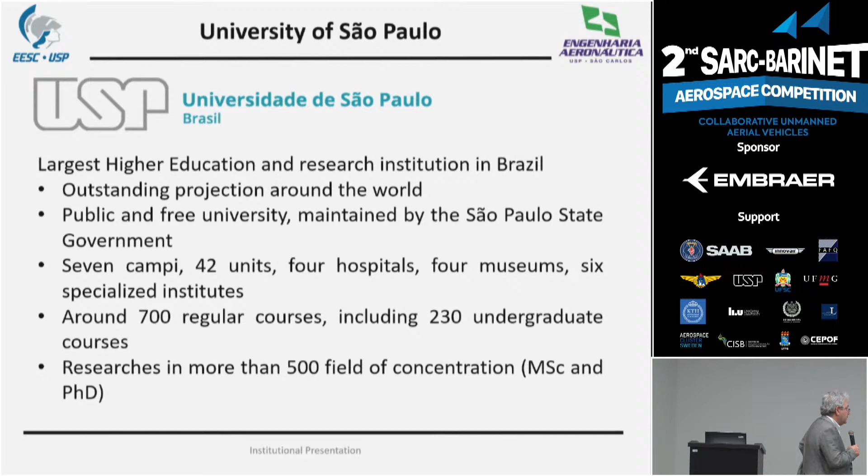Let's talk about the Aeronautical Engineering Department. In fact, this department is quite new, it has almost 50 years in this School of Engineering. But before that, let's talk about USP, the University of São Paulo. It's the largest higher education and research institution in Brazil. We are placed among almost the 100 best universities in the world, and we have seven campuses, 42 units, and among those we have 4 hospitals, 4 museums. Most of the museums of the state of São Paulo belong to USP, and 6 specialized institutes.

About the courses, we have 700 regular courses, including 230 undergraduate courses. USP is very well known to have both graduate and undergraduate courses at a high level.

Some pictures here, and the campuses. We have São Paulo as the main campus where the rector stays, so the rectory is there. Our campus is number 5, of course, the best one. But anyway, all over the state of São Paulo, we have campuses from University of São Paulo.

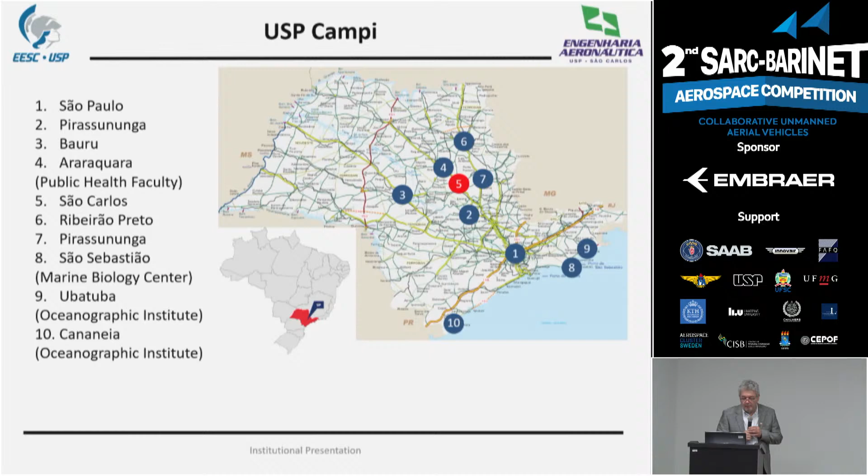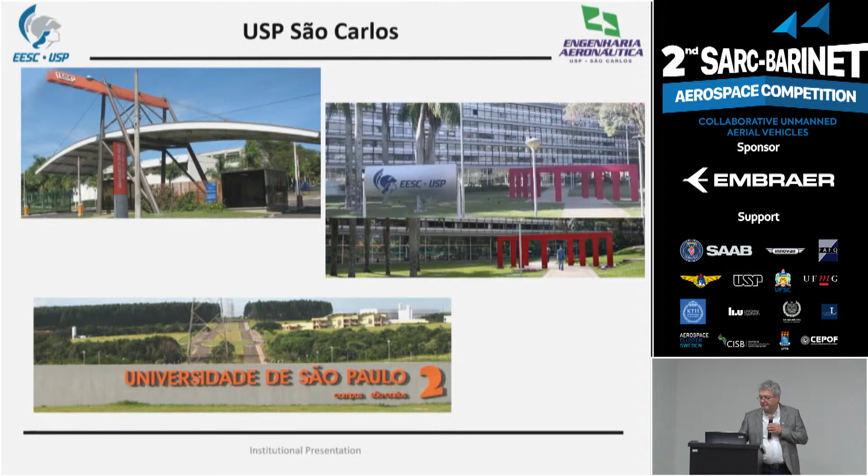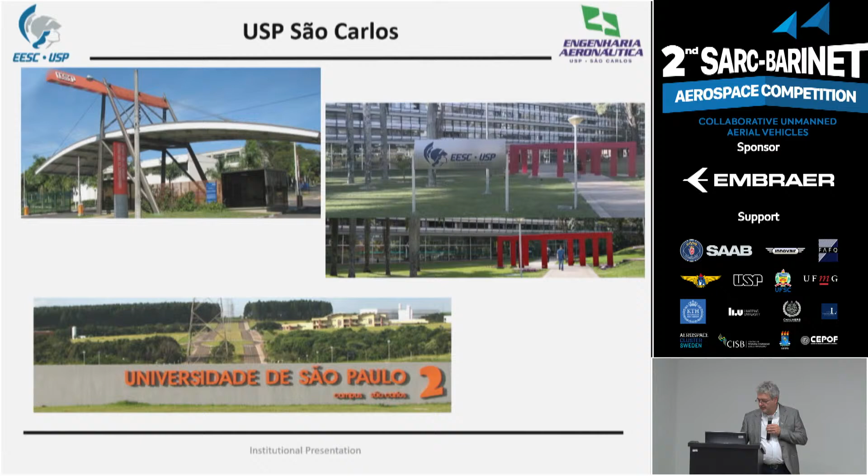1953, the School of Engineering was created here in São Carlos. Next year we'll be 70 years old. After that, campus number 1 was created, and then some departments migrated to constitute the Institute of Physics, Institute of Mathematics and Computation.

And in 1994, the Institute of Chemistry. In 2002, on demand of new courses including aeronautical engineering, campus number 2 was created. And in 2010, the Institute of Architecture separated from the School of Engineering and became its own institute.

This is the main, the 2 campuses. You can see that number 1, area 1, was all crowded, so we had to move to the new one, which is this one we are at the moment.

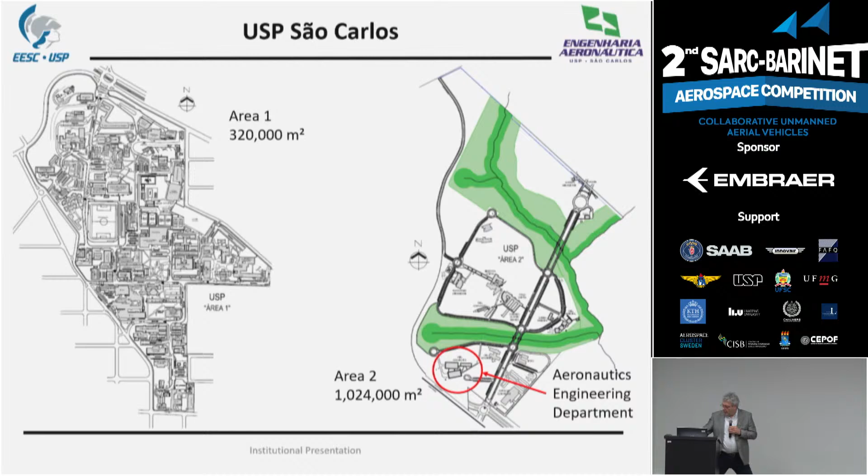We have stayed in São Carlos city since 1953. São Carlos is very well known as a capital of technology today, but in fact we have 2 big universities, the Federal University of São Carlos and the University of São Paulo, and also 2 Institutes of Research on Agriculture, which makes São Carlos a very unique place.

Like, numbers of PhDs by inhabitants are very high compared to Boston, for example. We are very proud about this. But anyway, this is a fact.

Some data from São Carlos. São Carlos is also in the way of the central technological axis of the state of São Paulo. It starts in São José dos Campos, São Paulo, Campinas, São Carlos, Ribeirão Preto. If you start from São José dos Campos and go up to Ribeirão Preto or even further, this part of the state of São Paulo is responsible for 40% of the income tax of Brazil.

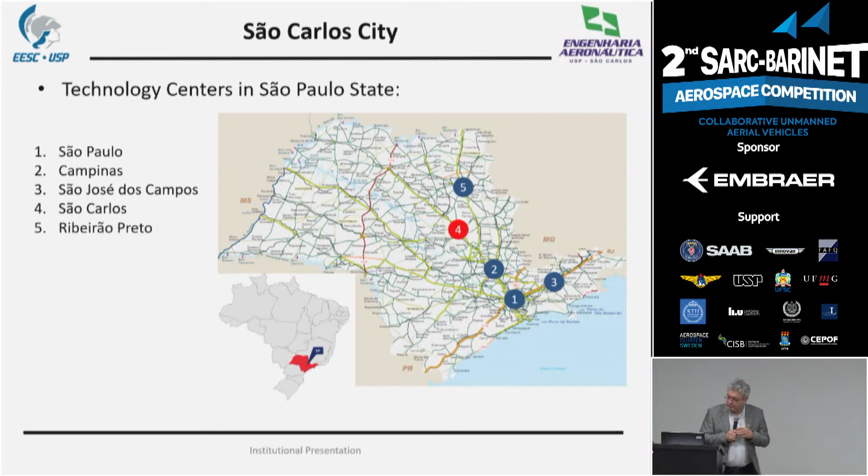Also, São Carlos has become a new aeronautical center after, of course, São José dos Campos, where the main plant of Embraer is located, which is very big. This is starting to become the second place for aeronautics or aerospace.

The São Carlos School of Engineering, as I said, was created 70 years ago, and we have many courses on engineering: aeronautical engineering, civil engineering, computer engineering, electrical engineering and electronics, energy and automation systems, environmental engineering, materials and manufacturing engineering, mechanical engineering, mechatronics, and production engineering.

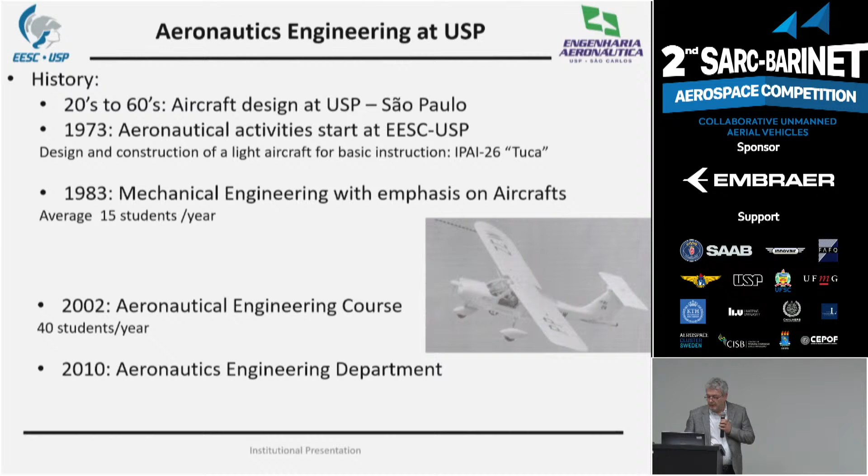In our course, we have some directives. For example, we try to treat students with open programs, and they have to develop learn-to-learn capacity. Also, 15 years ago, we started an internship program with Airbus, so we have international internships for students to go abroad to learn more how to work in the industry. Of course, we also have plenty of internships with Embraer all the time. Also, USP has a large program on double diploma, where people can go abroad to study at the same time. With only aeronautics, we have 8 universities in Europe to do the double diploma.

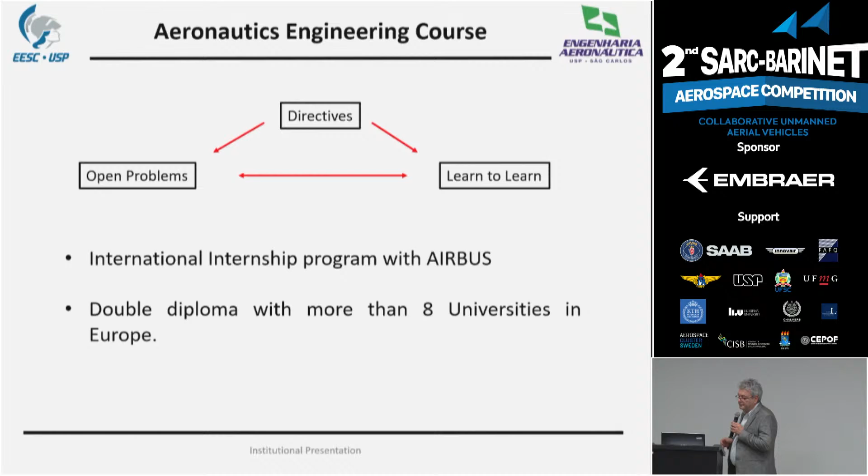This is the facilities we have today, and we're going to visit these over 2 days. In the laboratories, we have laboratories on aircraft design, aerodynamics, aeroelasticity, computational laboratory, flight dynamics, structures, aircraft maintenance, and acoustics. So these are areas where we're developing research.

All the students also participate in extra class activities. One of the main ones is the AeroDesign team. The AeroDesign team of the department is probably the most successful team in Brazil. They won several times here, and after that they go to the United States for international competition.

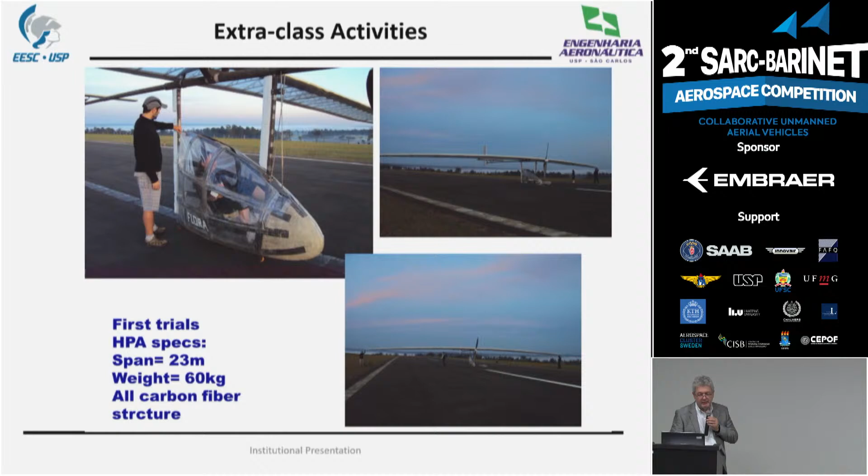Another extra class activity, for example, is human-powered aircraft. There is also an aeronautical week developed by the students. Every year there is a week where they do seminars and other things on aeronautics. The secretary for aeronautics also develops visits and other activities inside the campus.

I'm waiting for the computer to think here.

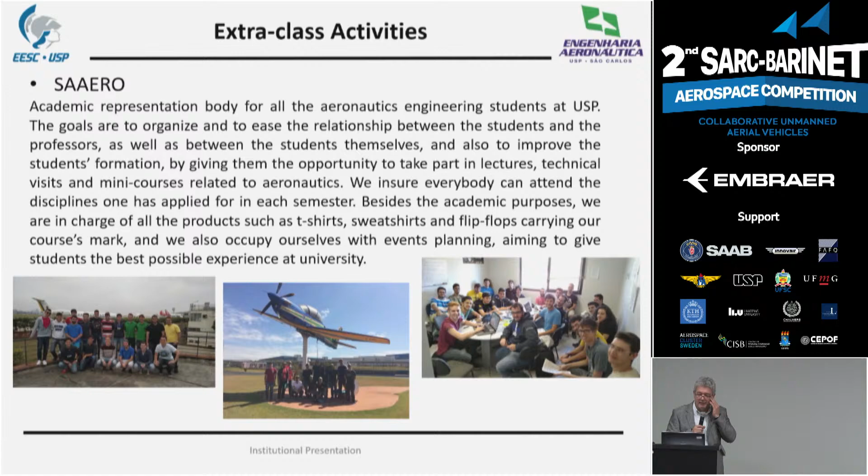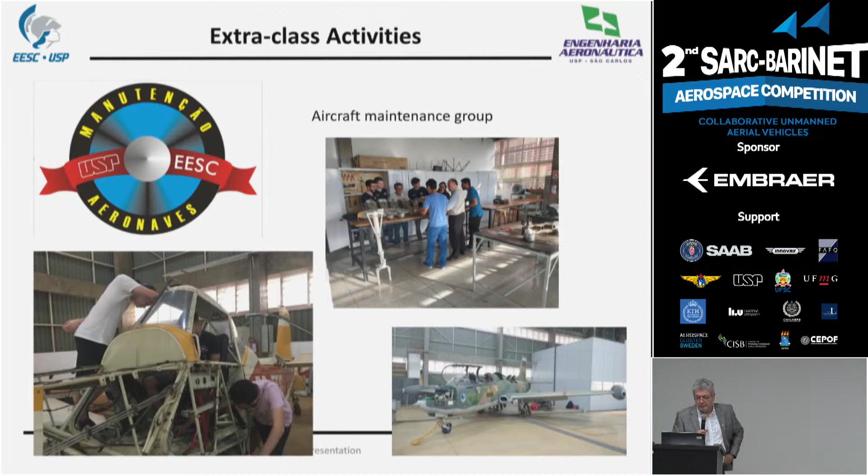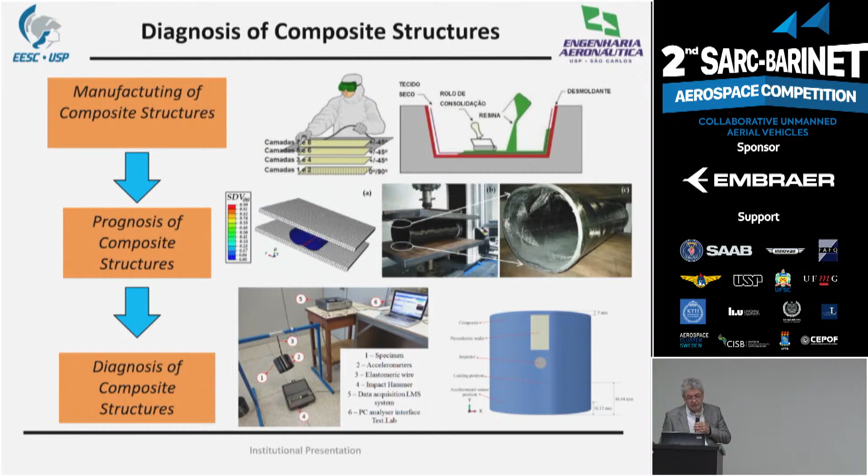And I'll pass very quickly because our time is not very high. Some research we do here in our department: the first one on materials, composite structures, prognosis of composite structures, flight dynamics and control systems.

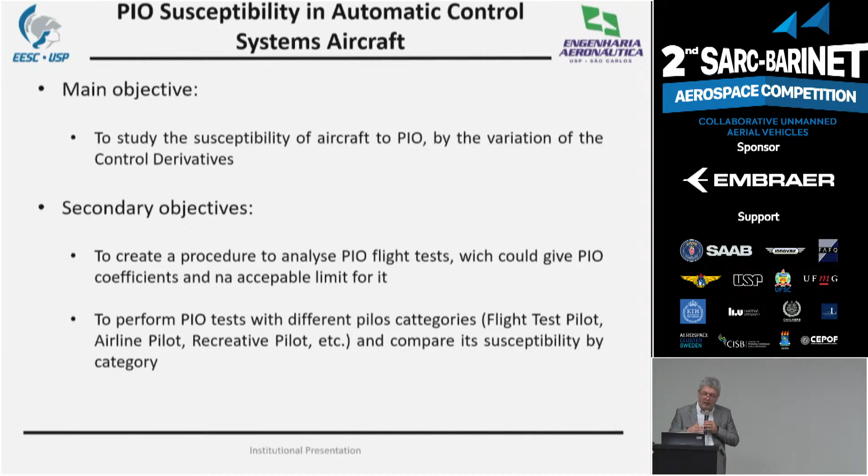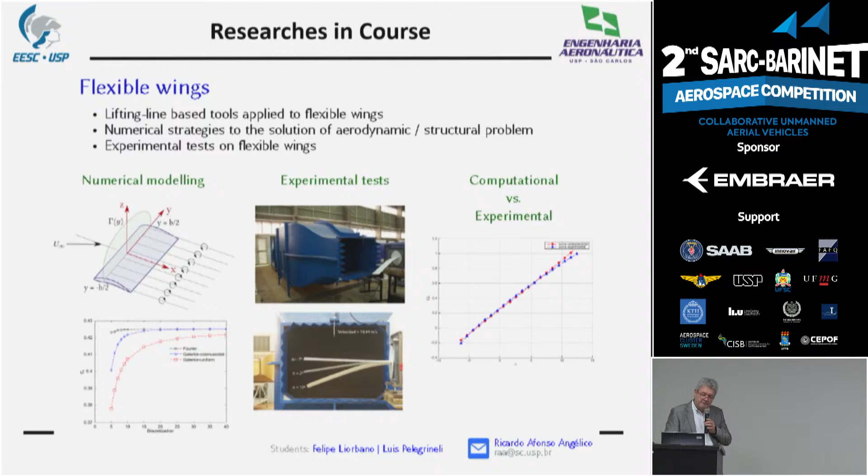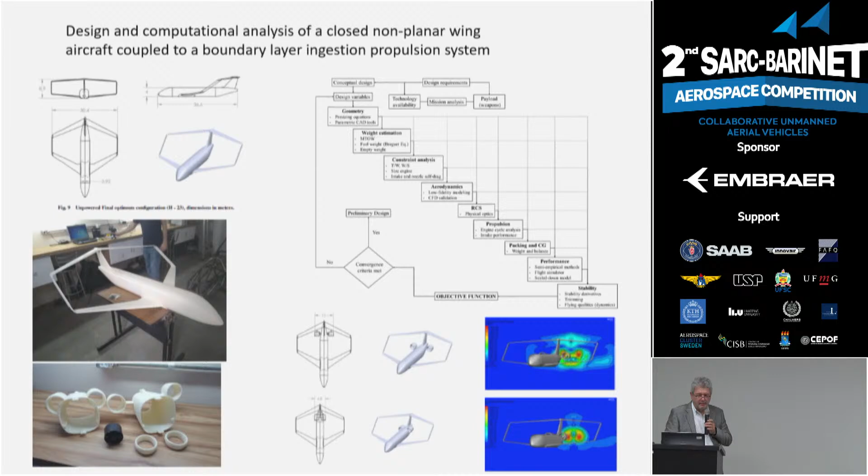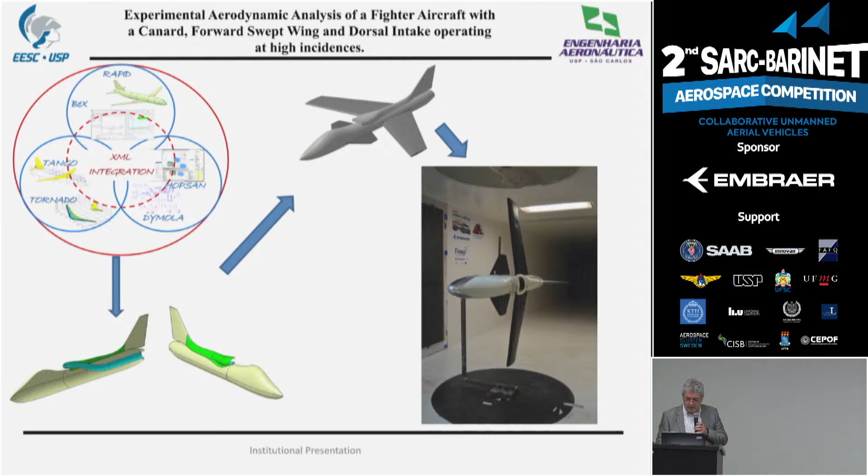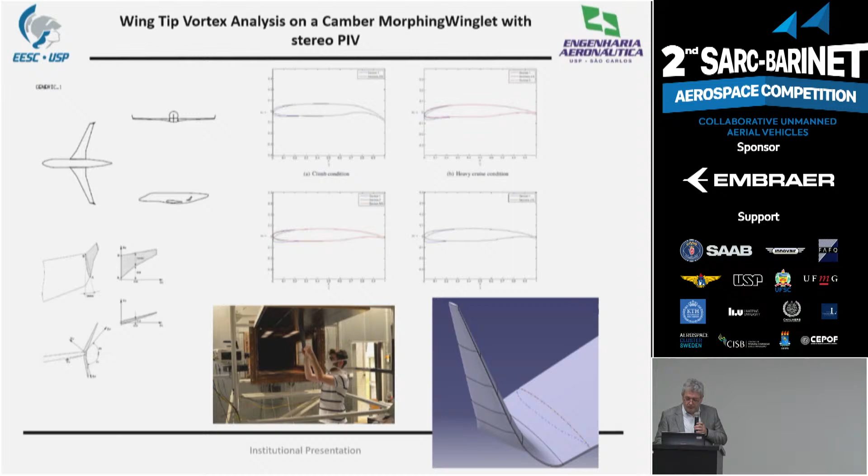Some morphing structures, like in this case winglet morphing, where you can change the camber to increase performance, using the winglet working not only at one point, but throughout the whole mission.

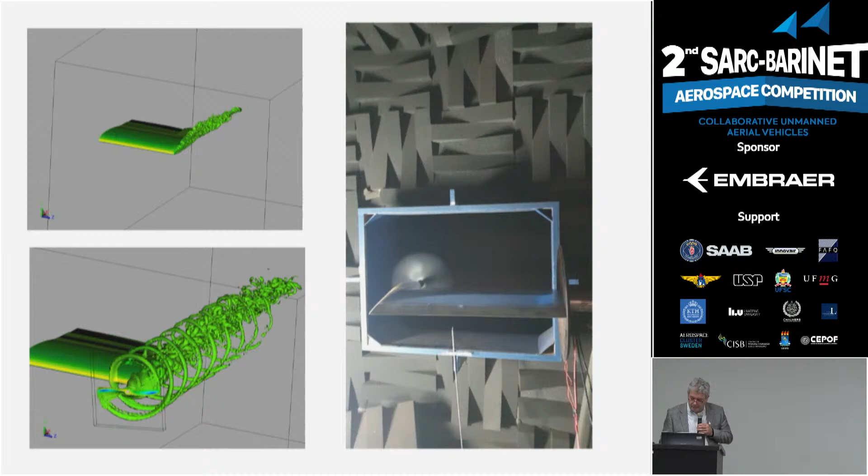We have this simulation doing aeroacoustics and aerodynamic performance, also using computational fluid dynamics and aeroacoustics - this is a PowerFLOW software. This is also a simulation with 2 rotors.

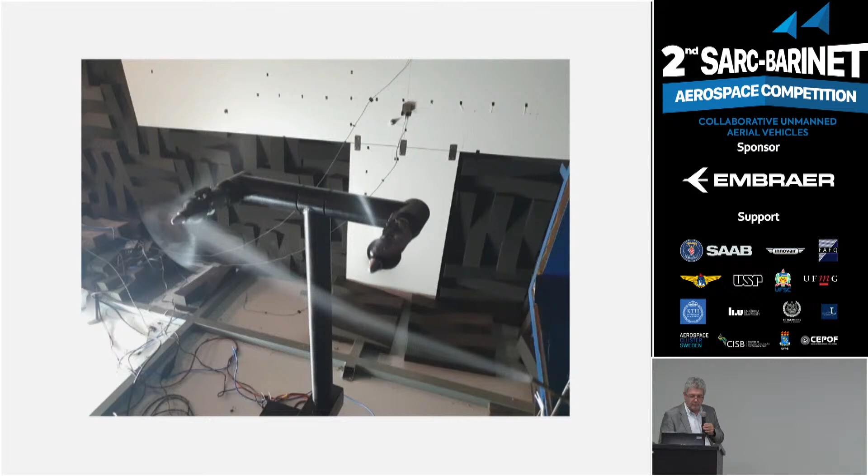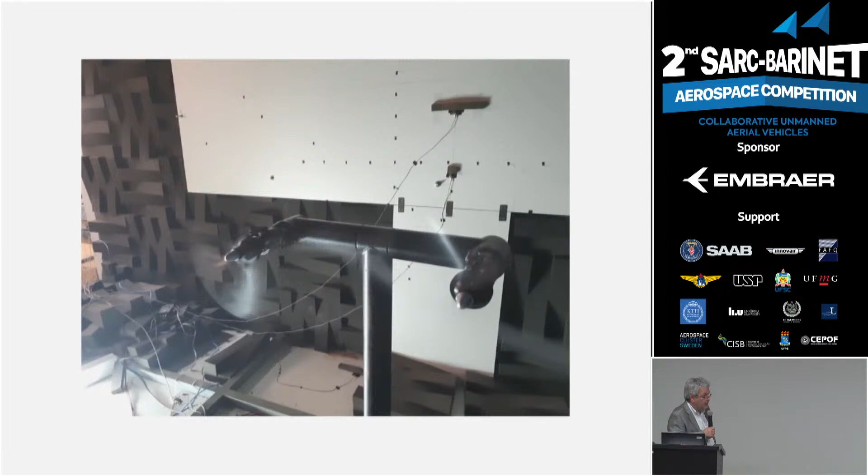Also, inside the propellers, we have a system to look at the interaction between 2 rotors and the distance between them. We measure aerodynamic performance of the rotors, also aeroacoustics, with the microphones.

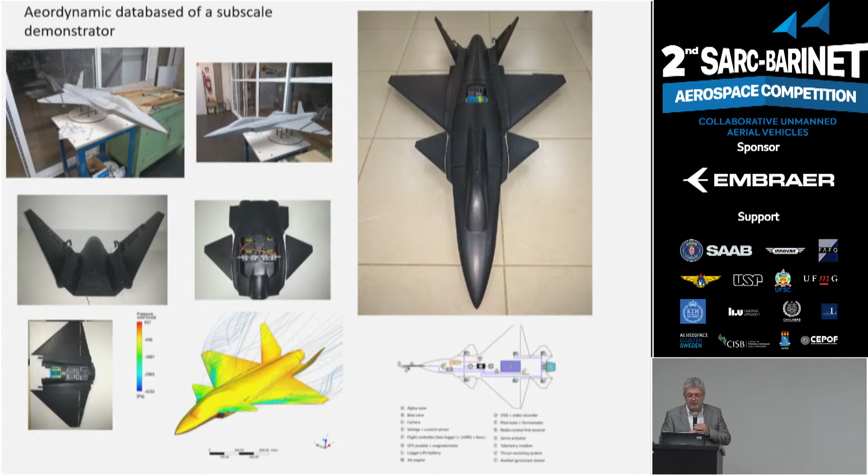Paulo can say a little more about this, but this was one of the projects developed in parallel with people from Sweden. It's an aircraft we can simulate - a subscale demonstrator put in the wind tunnel to see the system, like fly-by-wire, etc., to control situations of high alpha or other maneuvers.

We also have a project on a bigger wind tunnel for aeroacoustics and aerodynamics. Before that, I talked a lot about aeroacoustics - we participate in a Brazilian Silent Aircraft program, a huge program on aeroacoustics developed between Embraer and the research councils of Brazil. This is a kind of triple helix project - industry, university, and government.

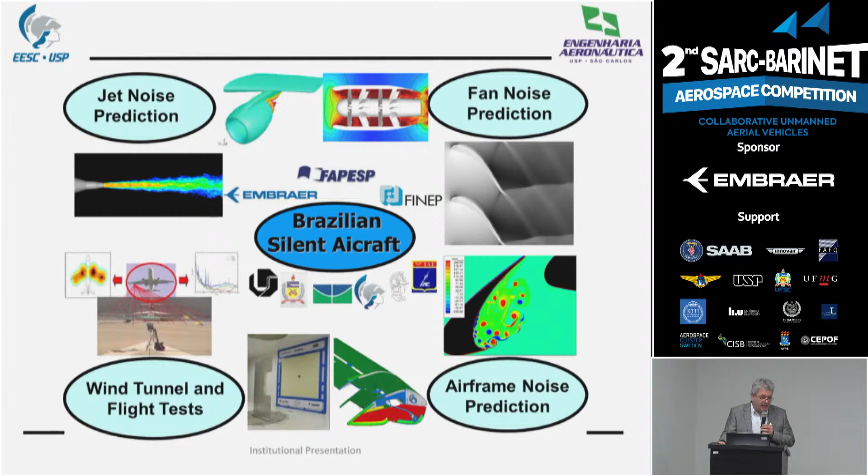Mainly we deal with jet noise prediction, fan noise prediction, wind tunnel and flight tests, and also airframe noise prediction. In fact, we develop all the knowledge - we start very slowly on the basics and it goes up to application of noise reduction technologies. This is a model inside the wind tunnel with an array of microphones - swept wings treated with high lift systems, which are responsible for producing more noise from the airframe.

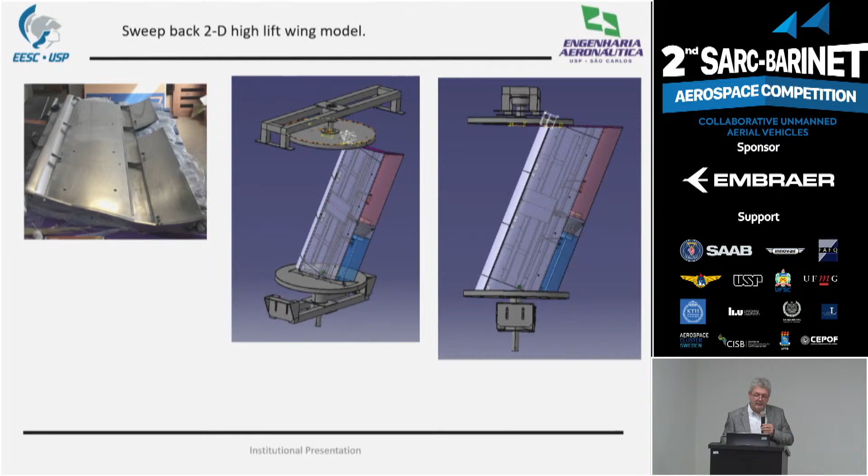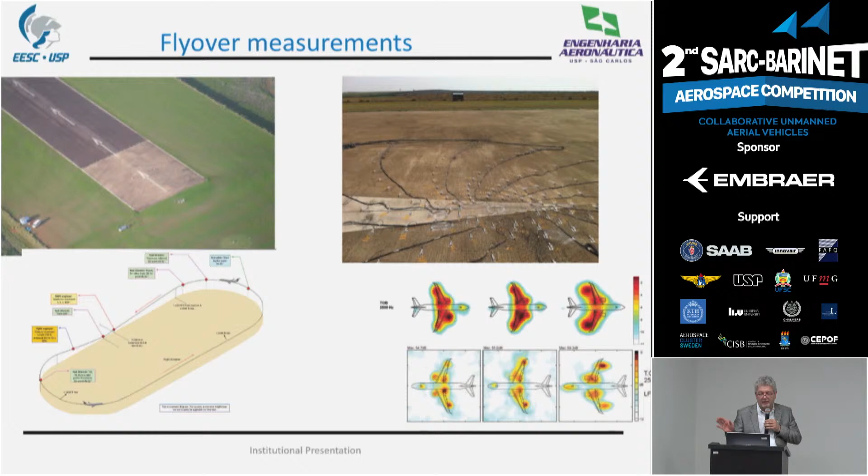Also, near here in GPX, we placed a huge antenna array of microphones on the track field. Aircraft pass over there, and we measure flyover noise emissions.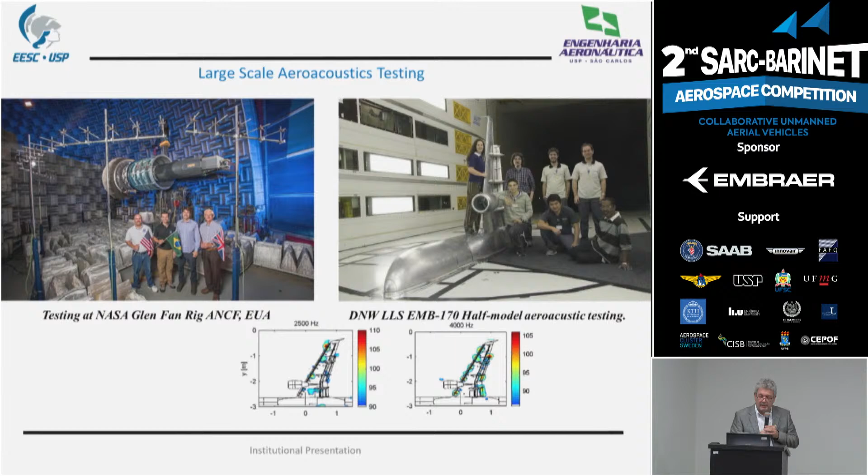Also within these programs, we have a contract with NASA to look at fan noise. We have a rig for fan noise here, and we also go to bigger wind tunnels to measure aeroacoustics, like the half model in DNW in Holland, and then the full model testing there. What we do is develop noise reduction technology, then go to the bigger wind tunnel to see if these technologies really work.

Also, with Boeing, we developed a complex nose landing gear for the 777, and we put in developing noise reduction technology there. This is tricky because we do a lot of testing with only one patent, so it's quite difficult to develop things.

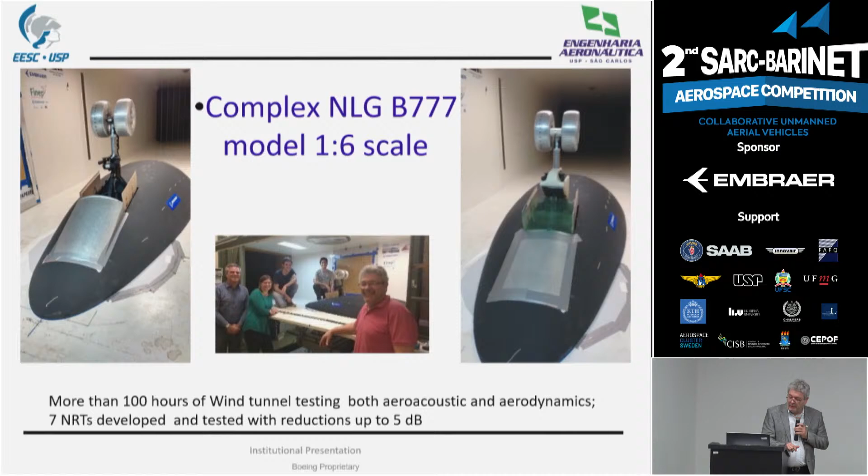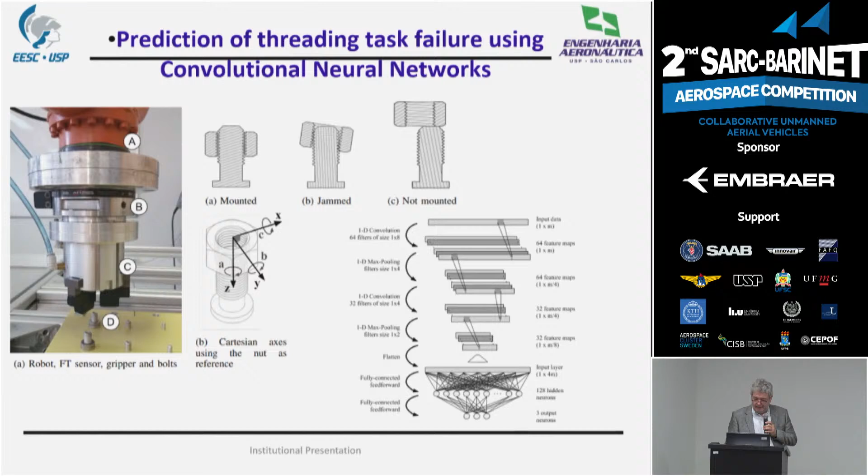Glauco is going to explain this. I'm not going to talk too much about these things. Glauco, during your visit, will explain about human interaction with robots, etc. Sorry about the confusion here, but I'd like to say just one word about Glauco.

I've been in a high-level group, since Gripen was sold to Brazil, deciding things between Brazil and Sweden. It's been high pressure, and thanks to Glauco, we have people today within this workshop between Brazil and Sweden. We've been trying to do this for many years, so today it's a reality to have you all here. I wish you a very good event, and I'll be there for the explanation. Thank you very much.

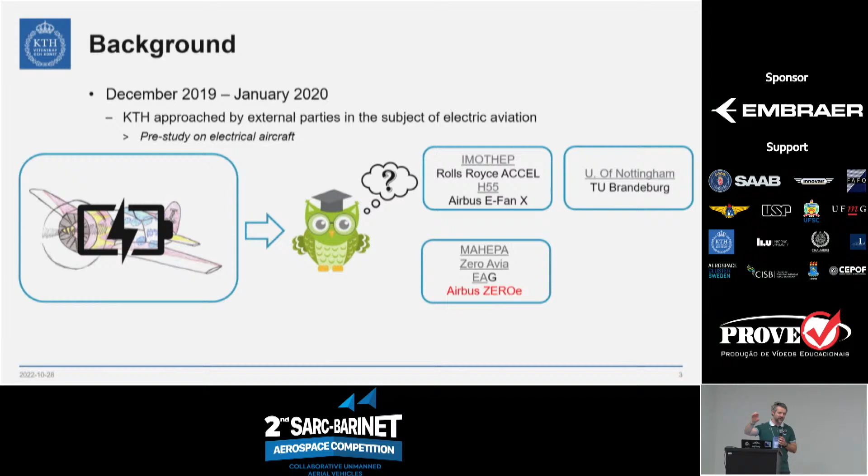But we are neither in the European consortia, nor are we a company, so let's have a look at what actual universities are doing by looking at hybrid electric propulsion, where the hybridization is the fuel cell, not the gasoline, not the jet A fuel, combined with batteries.

And what we wanted to do was to be multidisciplinary. Because the same people that were sitting around that table looking in each other's eyes asking, what have we done, what are we doing, represented, as we'll see in a moment, more than 3 schools within KTH. So all of a sudden the realization: we can actually do everything in-house.

Now that's pretty good. So we went for hydrogen, and we've taken a sort of interpretation of a system of systems concept, which seems to be another buzzword right now in aeronautics. And we looked at what other universities are doing.

Now, I've moved around a lot in this world in the past 20 years, so the first thing I did was look back at where I've been. The Magma project, done at the University of Manchester with BAE Systems - I believe DARPA was involved too - a flying wing fully controlled in flight through flow control, no moving surfaces if they don't want to. And then my undergraduate at Embry-Riddle in the US, which is basically aeronautics work, the Micaplex and the Azure, which is a place for students to meet industry, startups to be involved with research and academia, with the focus of developing UAVs and aircraft of the future.

So now we got, maybe that's where we need to go, because we're a big university, we have a lot of different skills, a lot of different topics we can study and work on. Let's take the lead into these 3 major examples.

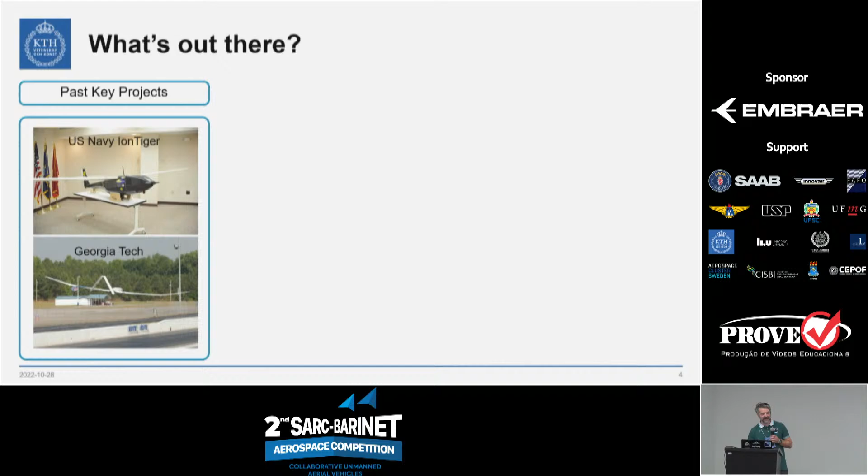Right now, 2020, 2022, these are the 2 main projects that we are aware of that are multidisciplinary and expanding. The first one is this hybrid in Holland, called Aero Delft. It's a student group, a student business, more or less heavily supported by TU Delft. And the idea is that in a couple of years from now, they want to design a full-scale glider powered by liquid hydrogen fuel cells, put 2 passengers in it, and go around autonomously - people in the plane, but not flying the plane.

From a more research perspective, we have ISAE Supaero with the Mermoz. What they want to do is replicate the flight by the pilot from Aeropostale, Mermoz, from Africa all the way, I believe, down to Brazil - anyway, somewhere in South America, my geography is a bit hazy at the moment. And because they know the fuel cell won't take them that far, first of all they planned stops like in the original flight, but they also included the concept of dynamic soaring, so they can use the wind like an albatross to fly and recharge the batteries when they need to.

So these are very high projects. And then we figure out what else is out there in terms of testing platforms.

Three come to mind. Again, TU Delft is now basically the biggest aerospace program in Europe, and they have designed for their Navy an eVTOL multicopter powered by the exact same system that we eventually adopted: fuel cells, off-the-shelf compressed hydrogen. Warsaw University recently built a flying demonstrator project with big support from the Polish Air Force to test research and new technology. And then the Aristotle University of Thessaloniki started about 10 years ago, give or take, with nothing. And with nothing, I mean they had no aerospace department, just two mechanical engineering professors who wanted to build airplanes because they saw the UAV was the future for Greece.

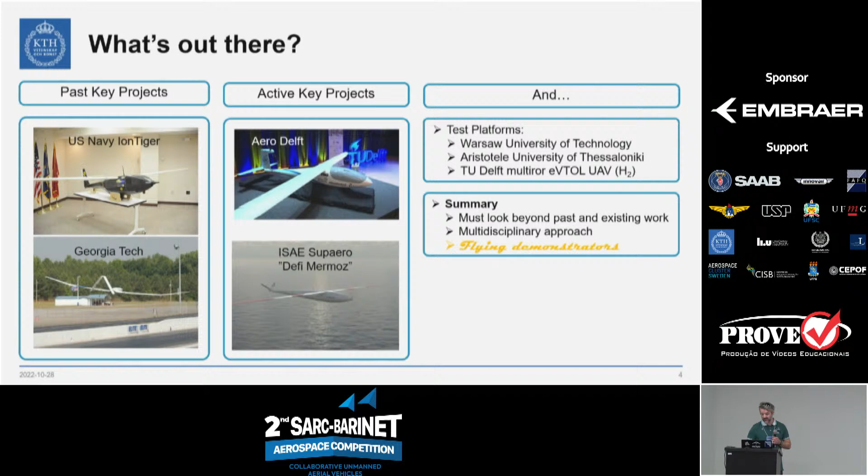Now that really attracted our attention, and that's what we did. So we'll talk about more a little bit later.

Based on that, here's the general overview for us, because as a university we need to give the right talk for people to believe in us. We wanted this multidisciplinary approach, and we wanted to look at fossil-free, net zero carbon offset, sustainable aviation from the perspective of aircraft technology.

A lot of work has been done on propulsion itself, and a lot of work is being done on air traffic management, on improving routes, landing and takeoff, to be greener in a sense. But no one seemed to be paying a lot of attention to the full package. That's where we come in.

Because we have a very healthy aerospace engineering master's program at KTH, although we don't have a bachelor's, we wanted to make sure that whatever we're doing here would directly relate to our education. So these projects became the conveyor to sustainable aviation, future aviation within our academic program. And students who before didn't have projects to work on and try their knowledge, all of a sudden have something to work on in extracurricular activities.

You'll see very soon that we don't match the USP level of commitment when it comes to building and competing, but that's okay. The third pillar in our big proposal to KTH is that we need to be able to build a new research group. Again, we have several centers of excellence, seven research groups that can each work on one piece of the puzzle on their own, but nothing aeronautics-related brings them together.

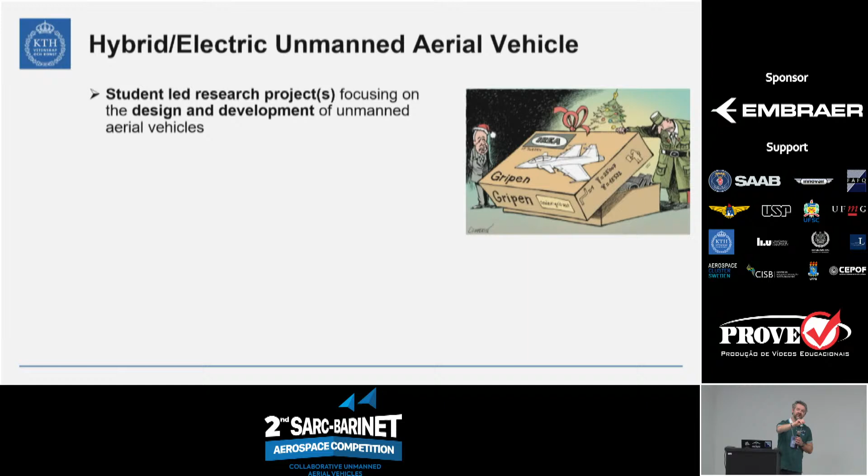We wanted to design and develop an unmanned air vehicle. That's not the key thing though - we're not designing the next commercial aircraft. That's beyond what we can do right now, and beyond what we're interested in. We want to be able to do something, ask the questions, address them, and hopefully give information that helps answer these questions, all for the benefit of our students as well.

So the first case study: we want an aerodynamically efficient aircraft, which could be the aircraft of the future. We'll see what we did - you have a couple sitting here on tripods. Although we're not looking at designing a passenger aircraft, we want to put the bug in people's ears about what it's going to be like in 20 years' time. We can't keep looking at tubes and wings forever. And that's what most of the projects we saw at this level also did - tube, wing, glider type, fuel cell, great, but nothing that looked at the whole picture.

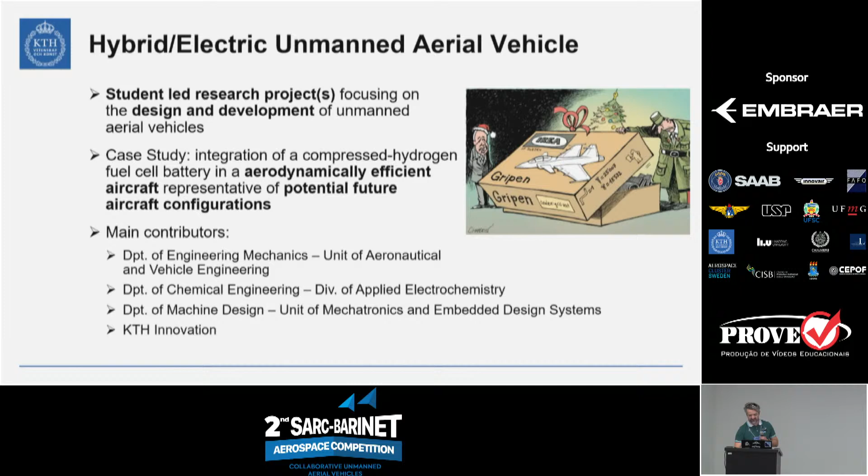As I said, for people in aeronautics, it actually splits into two different subsections. The aircraft part, that's me. The composite manufacturing and research, that's Professor Malin Åkermo. Chemical engineering, Professor Jonas Lindbergen - he is the fuel cell person at KTH. Then we had machine design with Professor Lei Feng, mechatronics, embedded systems, energy management - we'll need all that once we build the final airplane. And to address the last pillar, academia meets industry, KTH Innovation is the driver for us to talk to future partners beyond the ones currently established at KTH, and is also the place to go if you want to get a startup.

As with anything, we started with the conceptual design phase, following the traditional classical design processes. Design requirements: we wanted it aerodynamically efficient. We looked around - most people were flying around 20-25 meters per second. We wanted to make sure we could do more than previous projects, so we set a target of 2-hour flight endurance, with net zero carbon offset as a key thing - compressed hydrogen fuel cell and batteries to go along with it.

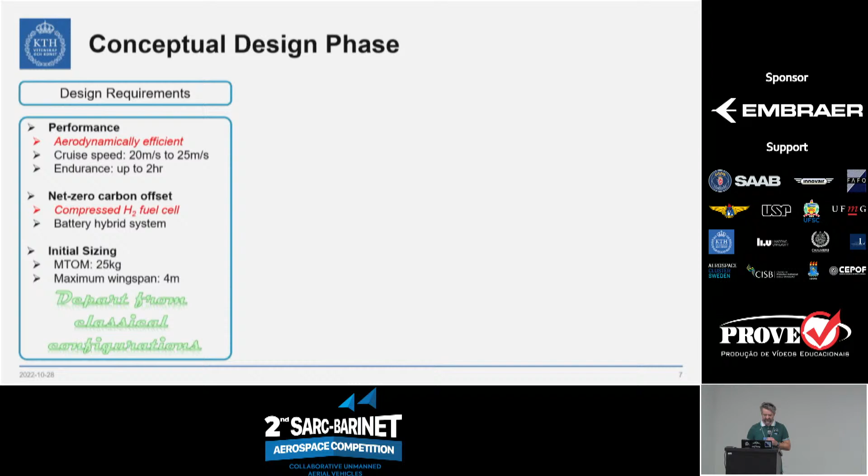Initial sizing: 25 kilograms maximum takeoff weight, that's a big airplane. 4-meter span, that's a big airplane for a university. But hitting these two targets set us apart from all the projects that came before us. They could have a very large wingspan, but very lightweight - never heavyweight, that's always a bad thing. So we're trying to look at it from a different perspective, and again this is all to depart from classical configurations.

Then we looked at dynamics and performance. Aerodynamically efficient meant blending with the body. Our students actually wanted to go down the route of a box wing. We stopped them, because as this is the first project in maybe 20 years that we're doing, we figured let's do something interesting, but let's not overkill it so we get stuck and can't progress.

The second biggest issue we found in our literature review was that fuel cells can only operate at a particular temperature range. That's all well and good in a Swedish summer - 25 degrees, you're okay, go up 500 meters, you're in the right temperature. But try to fly this thing in winter - your problem isn't going to be cooling inside the aircraft where you put the fuel cell, your problem is going to be water vapor freezing, you get icicles inside. So we had to think about the particular problem of running fuel cells in what could be considered an extreme climate - Boeing did it in Spain, a very dry, other extreme climate. So we're bringing in the questions.

Looking around for the size we have, a 650 watt fuel cell is more or less what we need, and 100 watt-hours of lithium-ion batteries seems to be doing the trick on a napkin-type calculation.

And then the structure. Now, everything we've seen so far, you buy the fuel cell, you buy the tank, it's what they call a startup package, put them in. But future aircraft, you cannot simply get a tank, put it in, take it off and fly again. You have to be able to integrate the fuel cell and the tanks into the structure of the aircraft. Otherwise, every one of these tanks is going to be dead weight.

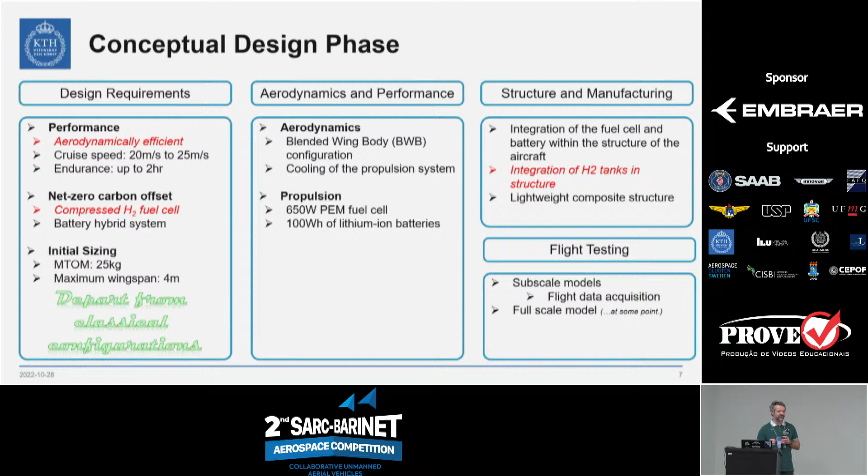And then we have to fly test it. Again, demonstrate what we're trying to do. We're working on a subscale, we'll see in a moment. And at some point, because right now we're still trying to convince KTH that this is something they want to work into, we're going to fly a full-scale model, looking for partners there.

Because it's a student project, we thought that could be kind of cool if we give it a nice-sounding name, you know, very CIA type if you want. So we called it the Green Raven.

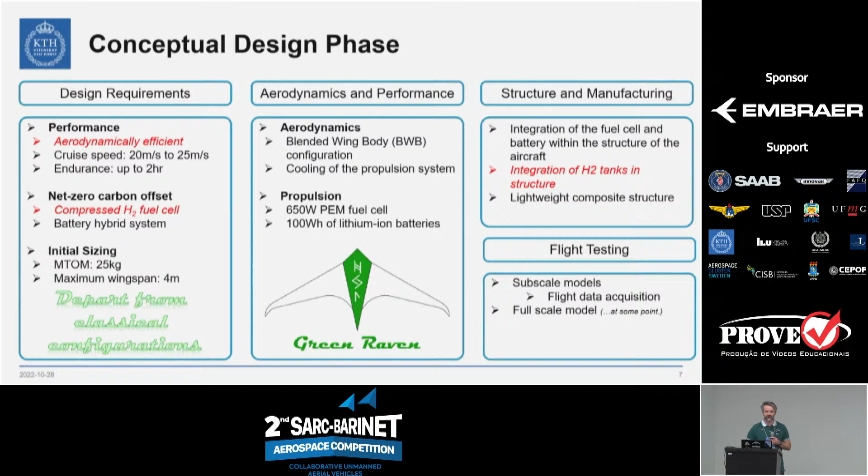The Green Raven is an homage to the fact that we are sustainable, green, and the ravens are Hugin and Munin's ravens that were looking at the world and bringing messages to Odin. So we brought the Scandinavian and Nordic culture into our design, and the three symbols there are three Nordic runes for air, water, and earth. So bring in, you know, a bit of mythology into the concept. After all, I'm Italian, so must do that.

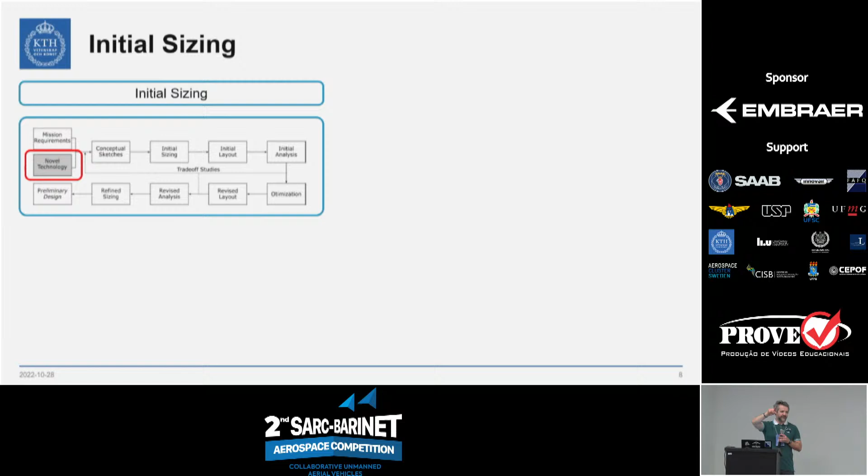Initial sizing, standard process. But unlike most of the projects that we've seen, our point was not what has been done before in our mission requirements. Our point was what has not been done before in our mission requirements, not what technologies. From that point onwards, same old cycle, go through it, do your analysis, back again the iteration, rinse and repeat until you get something that somewhat flies.

Because we are blending the body, we corner ourselves into not being able to use traditional ways of doing things, so reflex airfoils for both the wing and the body. Because we're looking at the aircraft of the future, we're looking at something that could fly transonic, so hey, let's put 30-degree wing sweep just for the sake of it, dihedral angle for roll, and because of the very poor performance of our airfoils, we had to add twist in order to be able to improve our stall. We'll see whether that works or not in a moment.

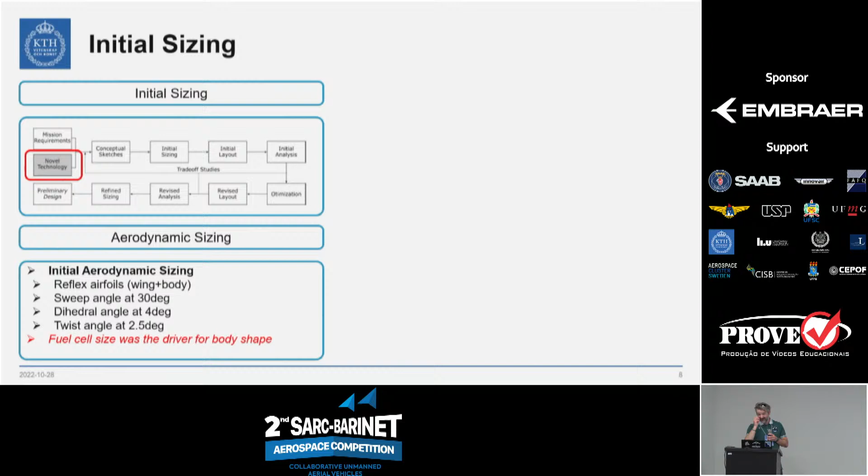And the fuel cell, being the heart of our project, was also the driver for the size of our body. And that's what we ended up with. Now, if some of you aeronautics buffs recognize something from the 1930s from the Germans, it was not meant to be a copycat. We just happened to have just about the same shape.

But you can see right there, the fuel cell is the biggest volume that we have to deal with. And because of that, it's giving us, as a good side, a lot of volume inside that body to be able to put as much instrumentation as we wish once the airplane is flying, if somebody else wants to test something in it.

So, aerodynamics being the core for us at the moment, we started with our students with XFLR5, low resolution, to get them started in the process. We must remember that without an undergraduate in aerospace, we had to draw from students that did that abroad, outside of Sweden, or Swedish students that were starting from scratch with this particular project.

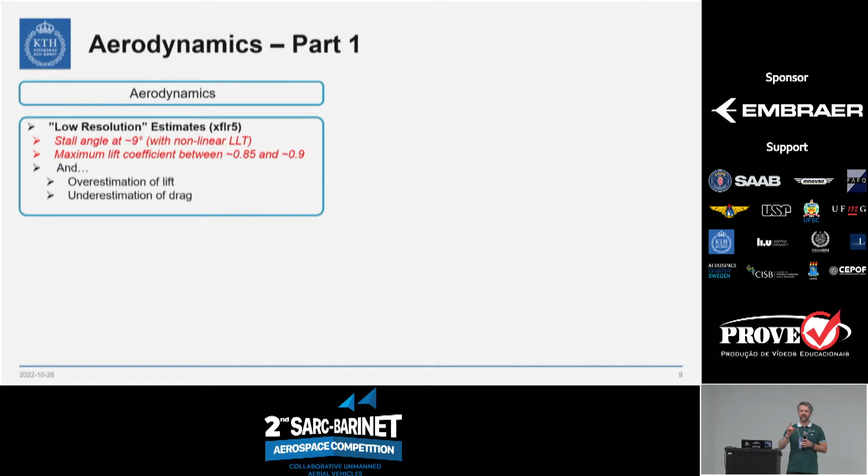Stall angle at 9, ooh, not so good. Maximum lift coefficient, less than 1, also not so good. But they are the consequence of the airfoils that we had to choose. So, we also know that not to work in our favor with XFLR5, the lift is overestimated, the drag is underestimated, the viscous model is not up to par, but at least they give us an idea already of the problems that we're going to face.

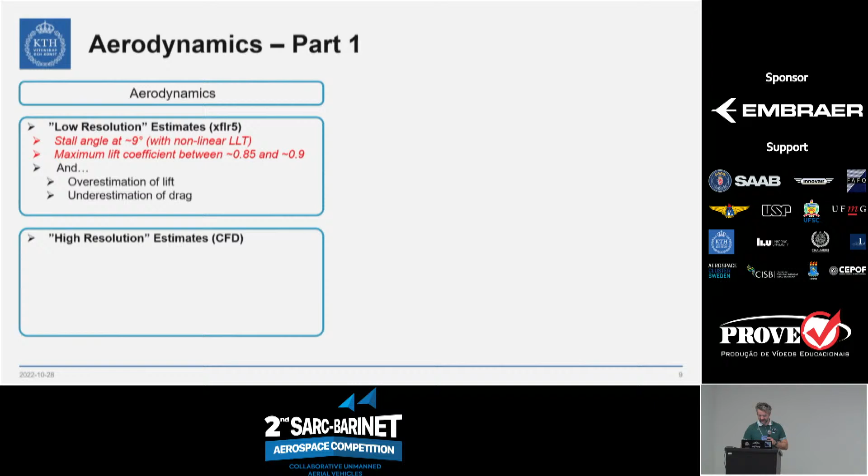It's always easy to get people to do CFD. They really like to work on computers. So look at what people have done before.

We have run steady state, K-omega, and Spalart-Allmaras. Both gave us more or less the same answer. You use one over the other if you want to look at the details of the flow or the big picture of the flow. We have a slightly lower alpha stall, not going in the right direction, but still max lift improves a little bit thanks to better turbulence modeling.

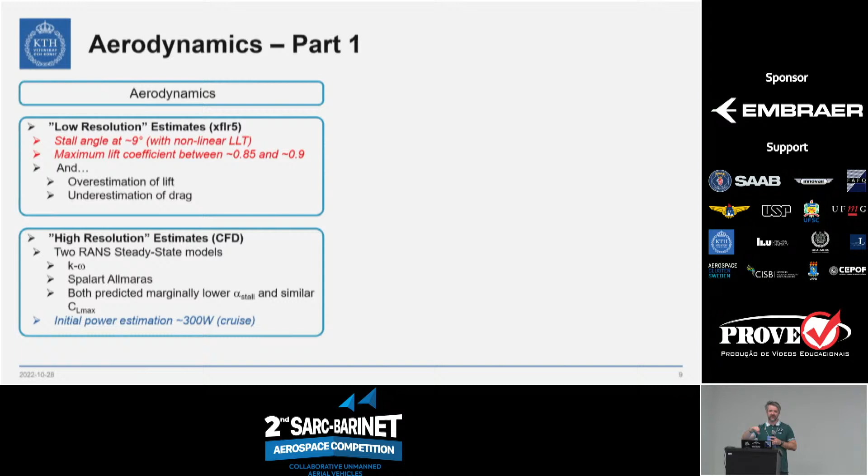The other thing that allowed us to do this initial CFD is that we confirmed that whatever fuel cell we've chosen, with the battery, the back-of-the-napkin calculation was in the right range for this kind of aircraft. And that's more or less the pretty picture that we got.

So right away, stall's a big problem. The wingtip stalls first, that's not good. We have very complex flow at midspan - very interesting from a research perspective, not so much from a flying perspective. Thankfully, the big, thick fuselage is saving us from having a very dramatic stall.

So we got one thing right. But the cool thing is that with all these issues, our students could really keep on developing their skills. So you always have to look at the bright side of a problem.

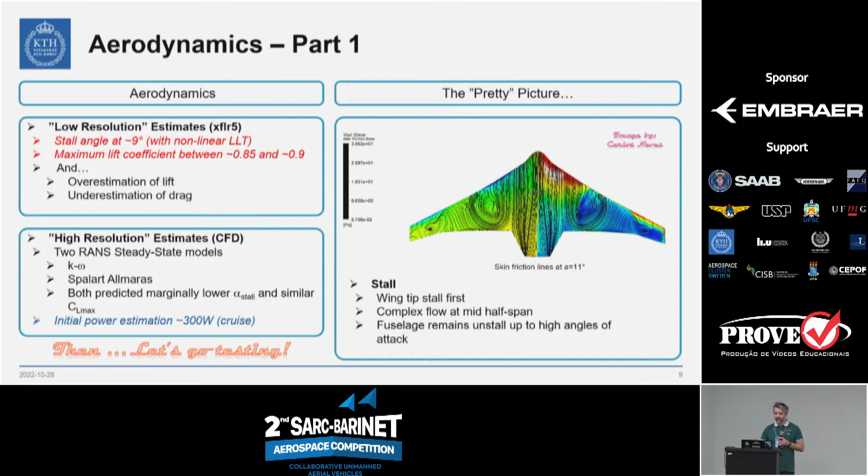So we decided to go testing. Now, at that time at KTH, the Nordic Wind Tunnel was being used for industrial projects, so we couldn't go right away in it. And we went to the University of Bristol.

Part of this is building a research group. Part of building a research group and a research emphasis is looking for international partners that are going to be complementary in our work, that are going to be happy to contribute to our work. And they were the first ones simply because one former colleague now works there.

2021, what we did - we designed the model in-house. It was a master thesis project, about 5 months worth of work. One student, Alfonso, designed and built the wind tunnel model.

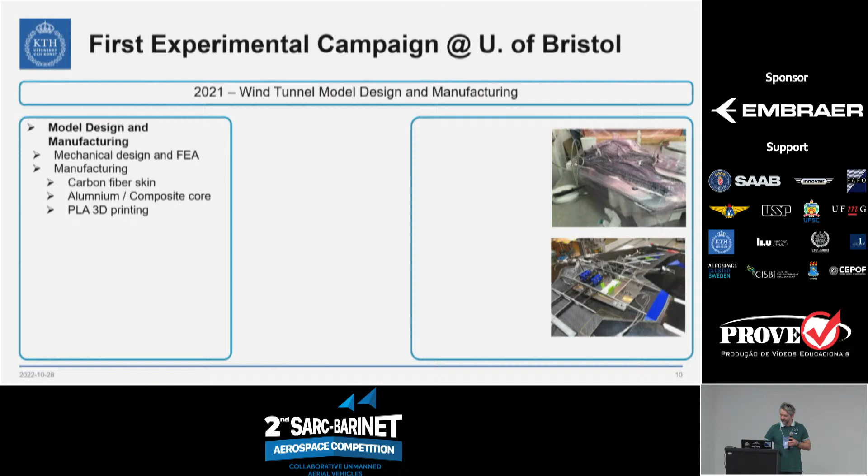Sarah designed the setup, because the tunnel in Bristol had a force plate under the floor, but no support for this kind of testing, since they used to do half-span type of aircraft. So we had to build everything from scratch, which was a great experience for the students, and we got it working with an automated angle of attack.

So we bought ourselves some time, trying to bring industry standards into this test. Instead of every time you undo a screw, move an angle, redo the screw, rinse and repeat - which can take days just to run one case - that was also quite interesting.

And we had pressure taps in our model, and with that, we actually built it so that the scanning valve would be inside our model rather than running tubes from meters all the way to the control area.

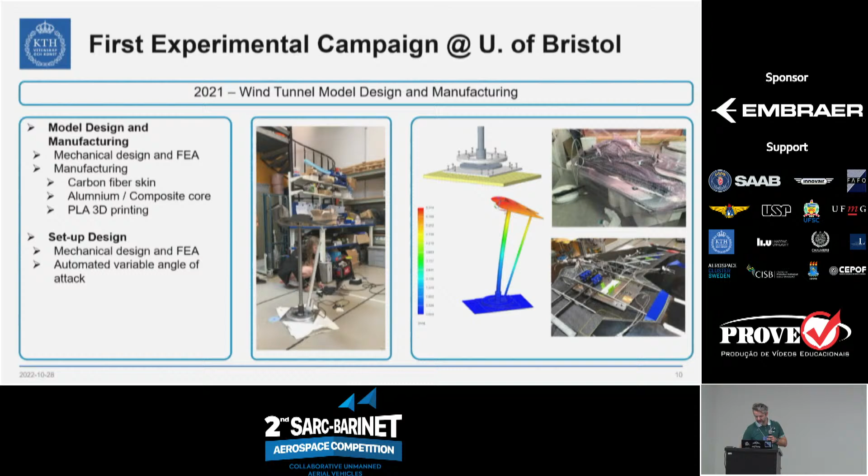That helped our production in terms of the amount of results we were able to capture, despite being half-quarantined in the UK because somebody on my plane tested positive with COVID, although I was not. The beauty of doing things under a pandemic.

Once we started working on our actual model, we realized that we need to figure out the correction for the support, because there were none. So we went for a numerical wind tunnel, and that was a challenge in itself.

A student took it upon himself to do that. He had zero experience in CFD, so he was learning numerics while trying to solve a very complex problem. We went with whatever we knew.

We tested the model in the tunnel without support. We get our curves - curves are good. They compare well with flight.

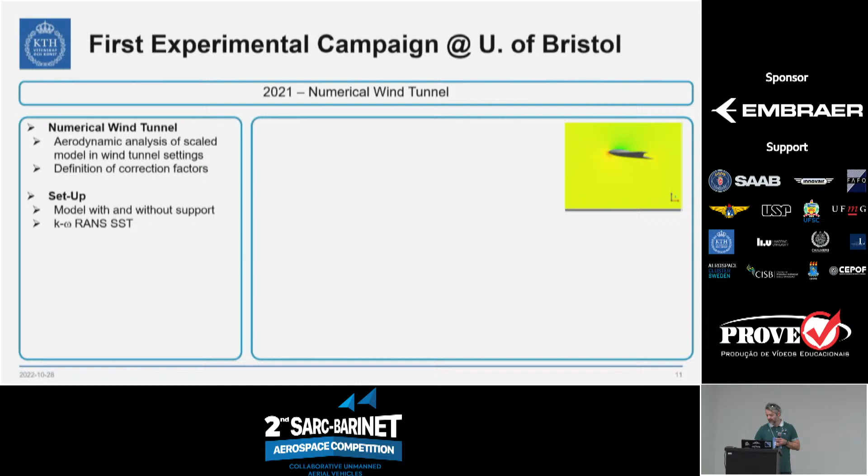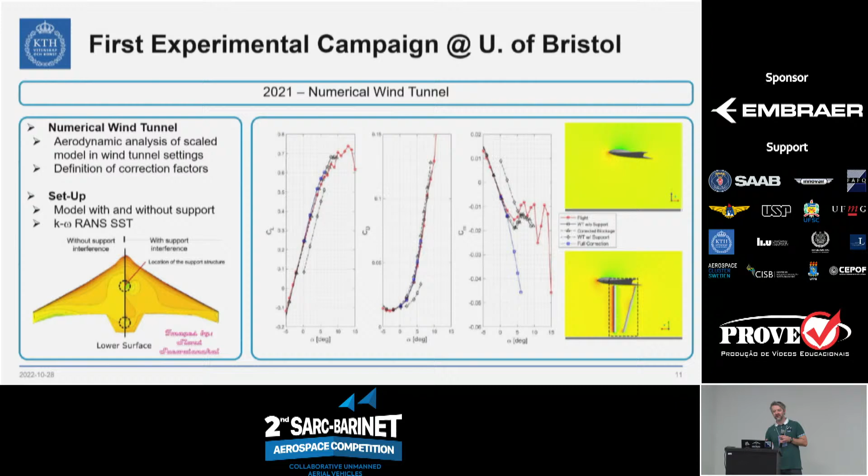We do it with the support. We know they're going to be different. And of course, both these things are going to have an effect on our flow, which is going to have an effect on our pitching moment. But all in all, we were able to use this data, at least on paper, to correct for the presence of the sting. And therefore, we walked into this test with a bit of confidence.

Once we got there, we set everything up, as I said, during COVID. Unfortunately, we did not trip the flow because we realized that our leading edge was already sufficiently rough to be fully turbulent without having laminar flow at low Reynolds number. Lift worked well.

We over-predicted a little bit the lift in terms of angle of attack and in terms of maximum lift, which is good. We know the drag is going to have an issue because the presence of that support is going to increase the drag. You can see both the free air and the wind tunnel with the model, as measured, and the one corrected for the support.

Our problem, once we confirmed the stall characteristic with our tufts, is that the moment just did not make any sense anymore. We eventually concluded that, yes, on paper we did the right process to get the correction for the support, but they were nowhere near sufficient or accurate enough to deal with the real model. Unfortunately, due to lack of time, we couldn't put into place the experimental way to calculate the effects of the support. We had that plan, but time was limited.

But nonetheless, we ended up presenting this at ICAS just passed in 2022. That's how we were able to share a lot of the grief in going through this project with two different groups - one from Tokyo, blended wing bodies, facing the same process and issues we did, and people that did this numerical wind tunnel, as in industry, who said, yeah, you guys are where we were when we started. So at least we have some confidence that we are going down the right road.

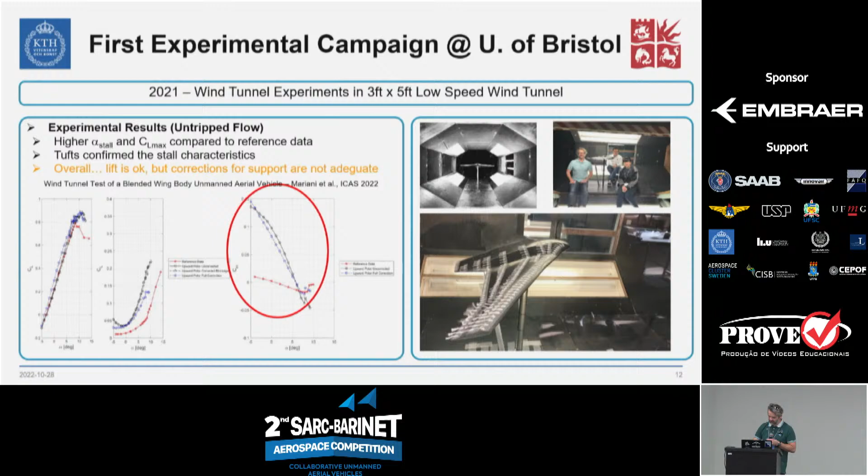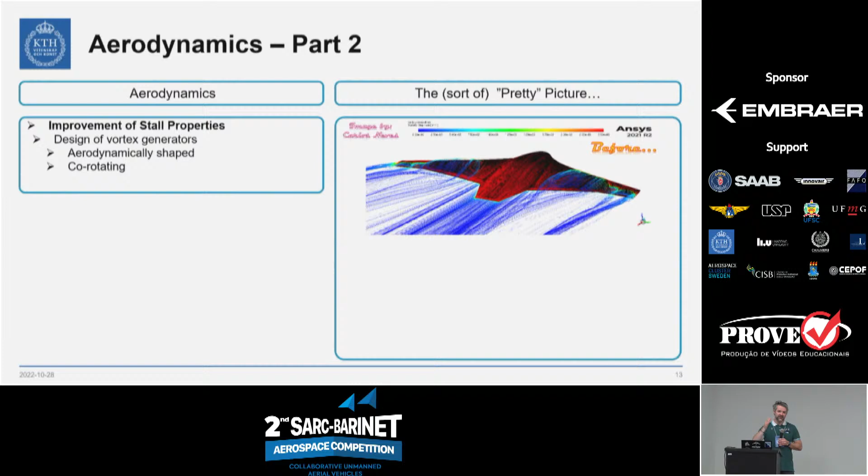So we went back, did more aerodynamics. One student took it upon themselves to improve the stall properties, and because we did not want to change the wing itself - we were beyond the last freeze, we were going to keep the plane as it was - the solution we came up with is vortex generators. Not to be like everybody else, we decided to make them aerodynamically shaped and optimized for this particular wing.

We did 2.5D simulations, both as course work and extracurricular work, on the airfoil itself, and it showed that we're doing quite good. So the next step was, let's do 3D, and yes, they work.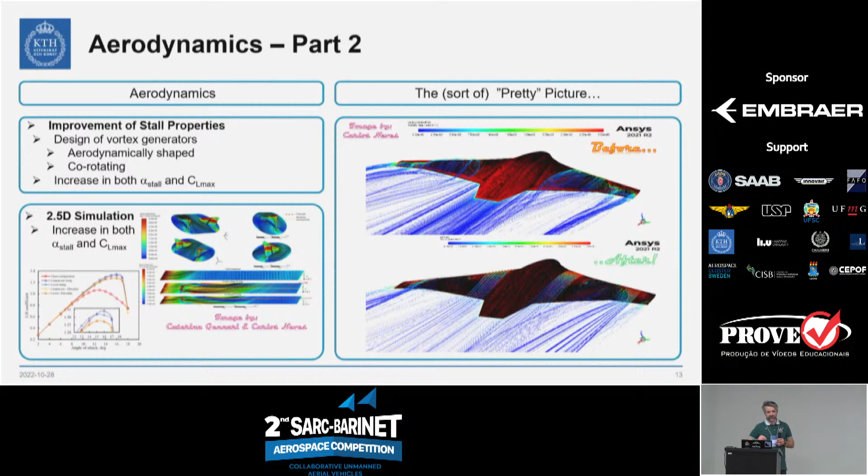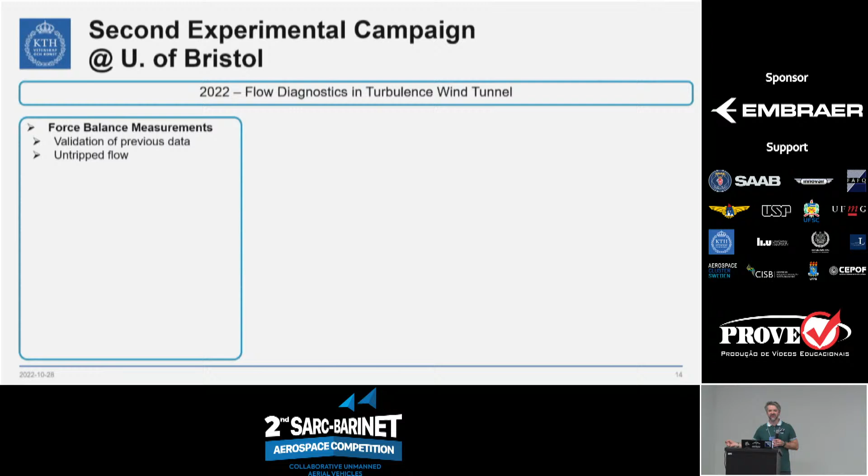Unfortunately, we couldn't go test them because by the time we did our next experimental campaign in Bristol just last week, the model we could work with was smaller than the original one we brought. The vortex generators would have been a fraction of a millimeter high in 3D printing, and they would have basically fractured right at the get-go. But we did more force balance validation, and the data looks exactly like what we saw in CFD. So at least we're confirming our work.

We brought 2 more students because, again, key is education. You see here both Carlos and Caterina. They are the ones who worked on the vortex generators with the CFD.

We want to do some PIV. We're working on getting the results done. We collected something like 4 terabytes of data in 3 days, so the students are hard at work to give us all the information that we need.

My personal obsession is bringing these UV tufts into an academic environment. I used them in industry. On top of the fact that they make really cool pictures to look at, because they're so much thinner than what we originally had on the bigger model, they affect the flow a lot less. All these are techniques that we're trying to bring into our project.

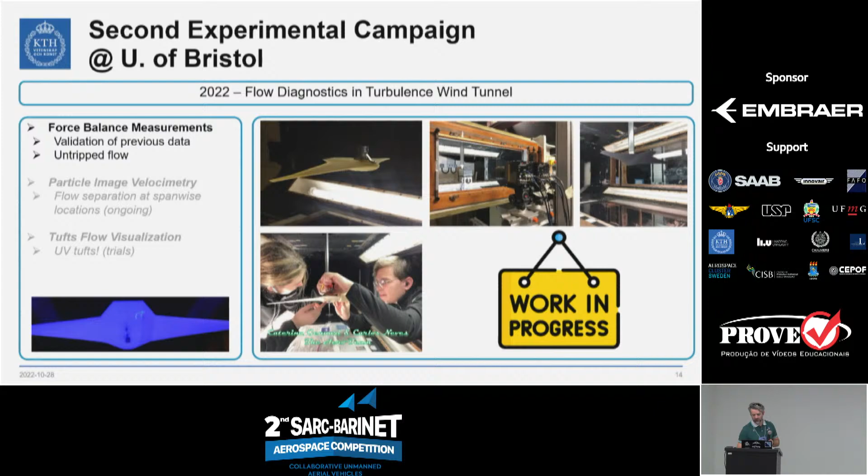Propulsion, we looked at it. We need to characterize it. One student did a full propulsion analysis, so we know how many engines we need, how powerful, how many propellers, how big the propellers. And then our researchers, postdocs and PhDs in electrochemistry, once they got their hands on the fuel cells...

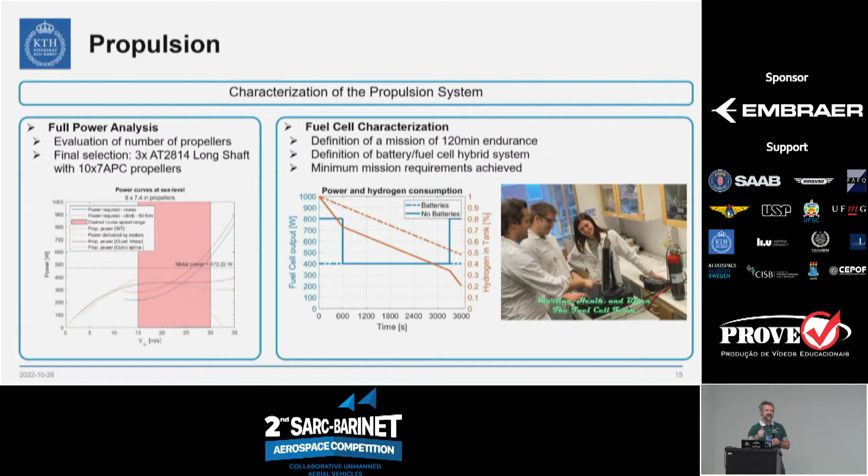Yes, we were able to eventually buy the startup package from an English company to work with it. They're now going through and debugging the whole system, because we don't simply want to plug it in and fly - we need to be able to do a lot more. So they're trying to beat all the triggers inside the system that cause a shutdown when they do something that is not the standard procedure.

But they confirm that that's exactly what we need, and they're having a lot of fun, because all three of them - there were four, one just graduated - are doing this beyond their actual PhD work. So every Friday they get together and say, now today, finally, we're going to have fun. They get to play with the research rather than just focusing on the research.

The next thing is flight testing. We're in the process of doing that.

Originally, we were going to do in-house manufacturing, foam, and our students in our structural courses are designing that. Then we got a little lucky. We contacted a company in Sweden with whom we work a lot, and they said, sure, we like your plane, can we give you both the CNC machining and the material? Sure. So hopefully by the end of December, we're going to have the airplane available for us to fly.

Being Sweden, it'll be cold, but we still want to fly in early January, but better early February, for one simple reason. Outside Stockholm, a bit of forest in the countryside, nice fields, a meter of powdery snow — it's a lot softer crash landing with snow than on hard turf. So we'll try our best not to crash all the time.

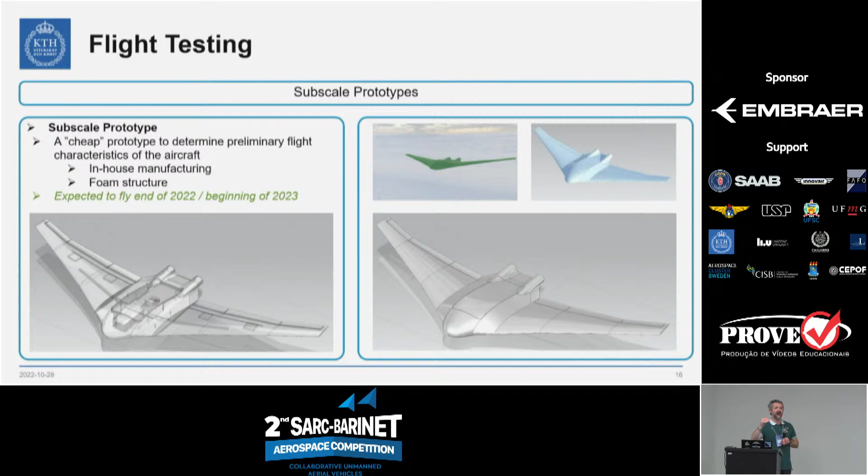So these are key projects. This is the one that's been driving us all the way from 2020 to now, and it's going to continue to drive our idea of a new research group at KTH. But we're not going to forget the people that took us there, the faculty I've mentioned. You can see the students that have been working on that project, though the list isn't updated — I've got another 5 or 6 that just joined. KTH gave us a bit of funding here, a bit there, all seed money to keep us working. Sometimes we were able to talk into an ear that was listening to us, sometimes a bit more difficult, a bit more politics to deal with, but at least it got us working so far, and gave the students a lot of opportunities, which gets us to the bigger picture — and I promise I'm almost done.

The one is KTH Aero. KTH Aero is the home for aeronautical student projects at KTH. We didn't have one as of two years ago — everybody was working in fluid mechanics and aerodynamics, mostly CFD, or they had nothing else to deal with. Then comes the Green Raven.

Then somebody says, we gotta go to infinity and beyond, because aero, well for me, is aeronautics. My colleague says, hey, aero is also space. So through the Rexus program, a partnership between Sweden and Germany for shooting things up into suborbit, they wanted to be under this umbrella of KTH Aero student projects.

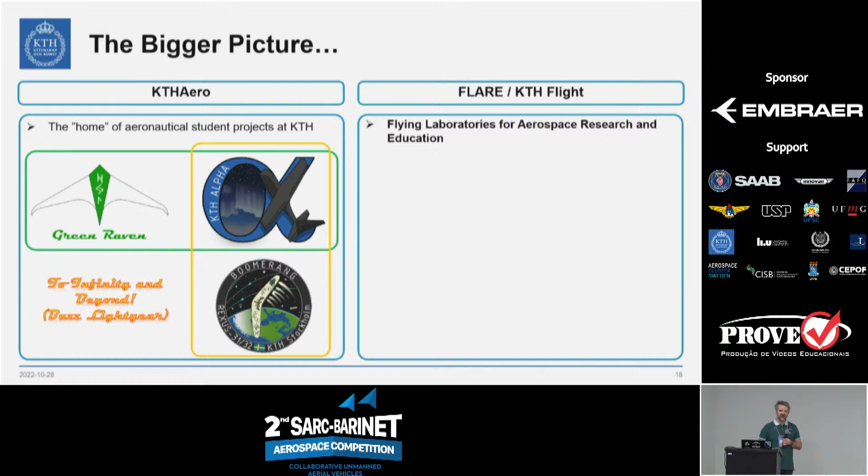And then we have a third project, Alpha, that connects the two, because Alpha is an airplane that flies very high looking at the stars. And then there's what's called FLARE, or KTH Flight — Flying Laboratories for Aerospace Research and Education — and that is our pillar of research in this whole project. It's called KTH Flight now because KTH likes very much short, catchy titles. I still prefer FLARE, it sounds more aeronautics.

It's a new home for research in aeronautics — directly, in its purest form: propulsion, infrastructure, we're dealing with hydrogen and electricity. You've got to deal with what's out there in the airports. And once we started looking at all that, we figured there has to be a new way to look at integrated transport other than what everybody's doing in urban air mobility. We're behind in Sweden with that — nobody's really working on it. Sweden values its peace and quiet. Stockholm people in the city center are not going to be fans of big helicopters flying over — at least that's my personal opinion.

But what we have is a lot of water around us, so we started looking at something different. Now, all this is to be proven right or proven wrong — time will tell. But let's talk about the student project.

Alpha is an autonomous light platform for high altitude atmospheric imaging — thank goodness we call it Alpha. It's a collaboration with space and plasma physics. Nickolay Ivchenko is the actual driver of that, and he says, I need a plane. I'm like, okay, what do you want to do? I want to look at the stars. Alright? Everybody's looking down — we want to look up, because his field of expertise is auroras, sprites, blue jets, and so on.

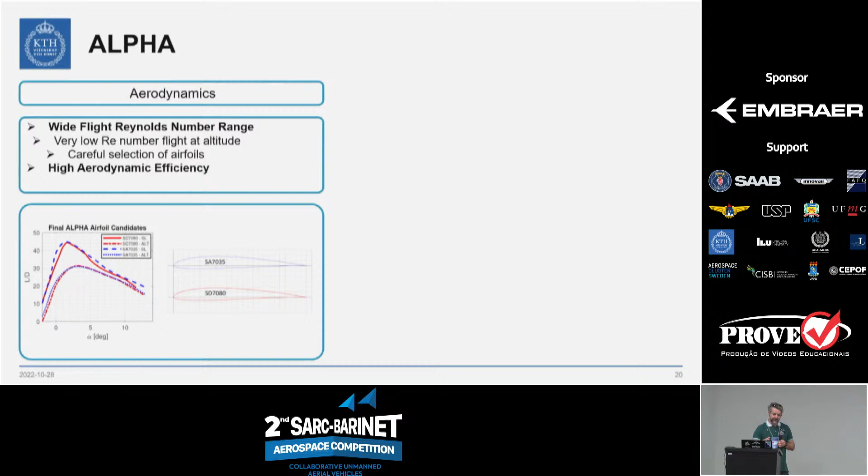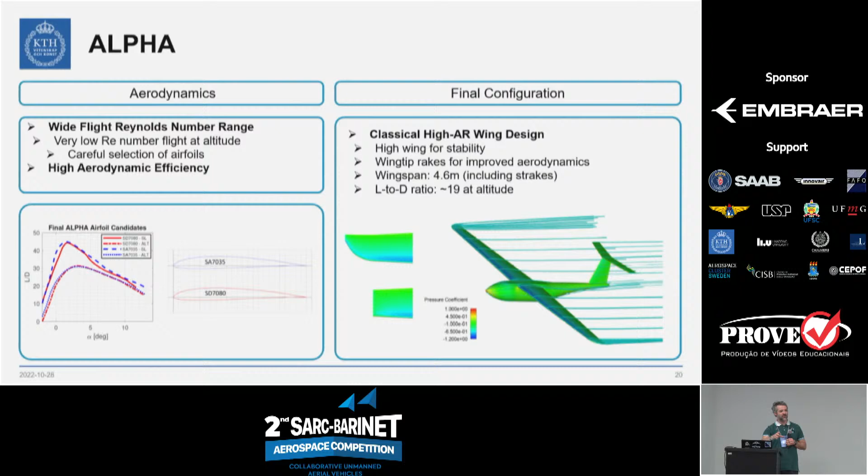Our students were enjoying the design. When we did that, aerodynamics was a big part of this. Aerodynamic efficiency, of course, had to be a priority. We didn't stray in terms of the configuration. The focus was not on designing a new idea of an airplane; the focus was on meeting the target of the mission. And for as much as it may pain someone like me, the good old-fashioned tube and high wing works pretty good.

We also wanted to figure out the subscale prototypes. We built it in-house, it flew, and we were quite surprised, quite well. All this was done by a couple of students who took the models, did the manufacturing, learned the CNCing, learned the flying. We had nobody who knew how to fly an RC plane; we were learning throughout the year to get us to this point. We used a foam model, because that's cheap and it can be fixed with duct tape.

We had to figure out performance, so we got ourselves one of these fancy thrust measurement devices that can measure torque. We did the static thrust measurements, and one student in systems and control decided to do a modeling of dynamic thrust. It works more or less.

And then we were out flying. We wanted to acquire flight data, not just by going up and taking rounds. We wanted to actually fly a predetermined set of maneuvers, to make sure that once we figured out how to do it here at a small scale, when we are at 15K, we know what the aircraft is going to do.

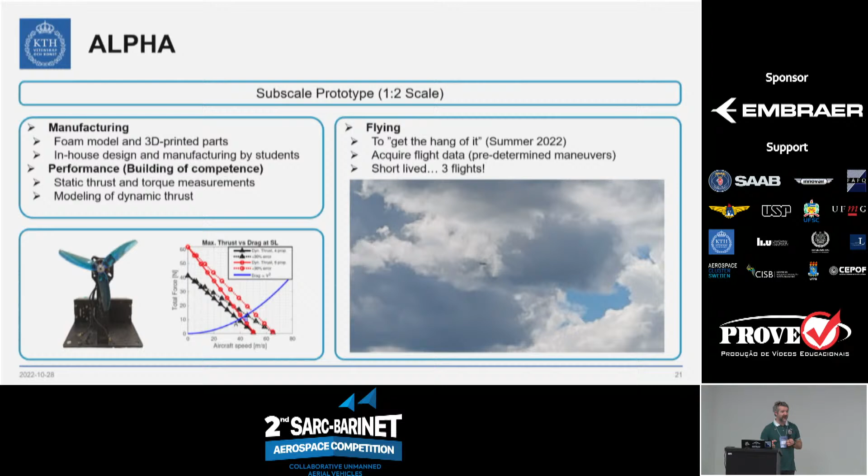Now, the idea was very good. We flew very well for 2 flights, and then our inexperience crashed us spectacularly on the third one. The plane was basically dust. We don't know why, except that our pilot, who was learning, decided to go fly on a very windy day, and that plane did not like it very much.

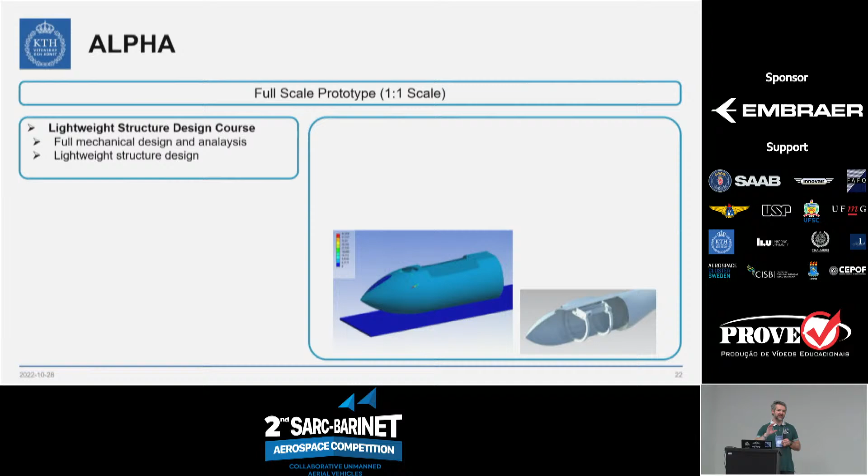But undeterred, we decided to build the full scale in a lightweight structure design course. This is more of an engineering work: fully mechanical design, the analysis, lightweight structure, manufacturing in-house. There were 14 students working on it—here are 5 of them.

And we built the first prototypes. So the wings were built with plywood, laser cutting, standard spars, cloth like the old-fashioned glider, but we managed to fly by the end of the summer, which was really the big issue for us.

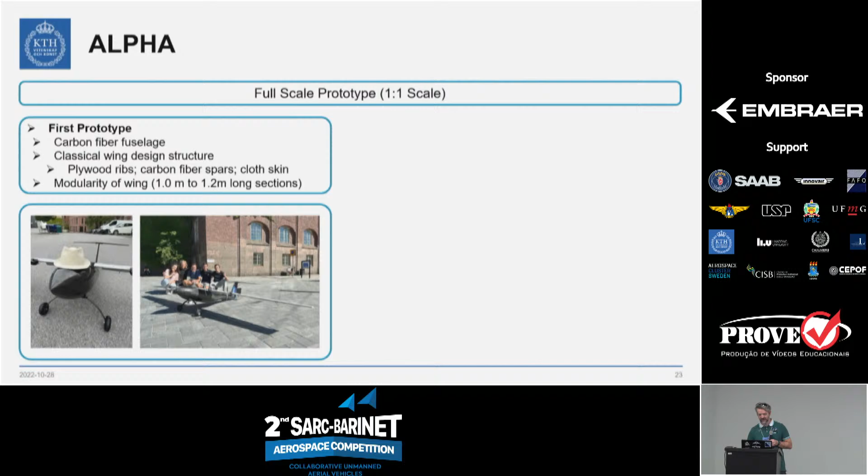Nothing completely out of the ordinary. We made the modularity of the wing, not the fuselage. Once you cut carbon fiber, that becomes an issue. So we said, okay, for the first one, let's keep it in one piece. And we went flying once.

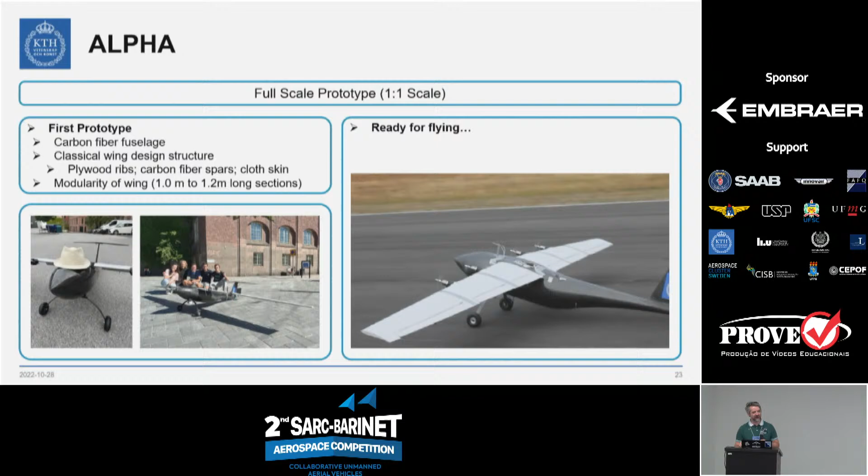I'm not going to show the very embarrassing ending of this video, but the simple fact that we were able to take off and manage to complete one turn was quite good for us. Again, none of the people there knew how to fly an airplane, either real life or an RC plane.

That gets us to the last 2 or 3 slides, I promise. It's the Ekranoplan. The Ekranoplan is research. With that, we started again with students a couple of years ago, and we want to design something that flew over water in ground effect. Why? One, personal obsession of mine. Two, it's a highly efficient aircraft. And three, technically speaking, the Baltic Sea is a great area for this kind of transport if you can figure out how to fly long distances.

Now, let's all remember the things that happened in the 70s with the Soviets. That's the idea. The Koreans did something as well. We built it in-house, we did sea trials, we know we don't sink, but we never managed to fly it, again, for that one key factor. We don't have people experienced to do that, and they were too scared to fly something at 50 centimeters off the water at 20-some odd meters per second.

But that gave us life into research. So now we have a project at KTH as a research project where we are developing a code with genetic algorithms to design a new, even more efficient wing using laminar flow for this kind of aircraft. That got the attention of some people in fluid mechanics who like to look at little things like turbulence. They said, 'Ooh, I like that. Can we do the very low Reynolds numbers?'

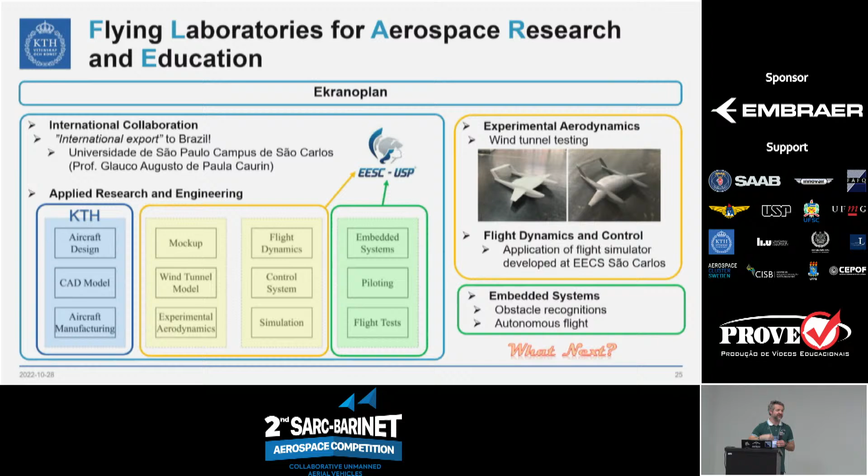And that got us to ask, what's next? How can we use this to, on one end, further research some more, but on the other end, use this as a transition to the real world, to the industry, to a problem faced on both sides of the ocean, here and in Sweden, when it comes to surveillance of big lakes, dams, and so on. So using an aircraft that can beat, in theory and in practice, the range and endurance of a quadcopter, that can still land on water so you can sit and take pictures and do sampling or whatever you want, but now you can fly faster, farther, for longer. So there's a lot of cool ideas, a lot of good things we can do with it.

Finally, after this long talk, there are 3 words I would like you to take home with you. One is education, that was the beginning of it all. Second is research, that's what we are developing ourselves into. And next is demonstrator, we want to prove that we can do it, and we want to use them to further the first two concepts.